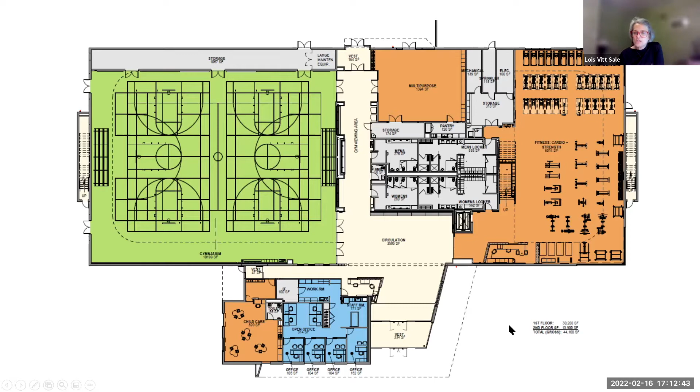It is part of a larger park complex with a 9-hole golf course, a skate park, and soccer fields. This was their first large-scale rec center in the suite of their buildings. It has an upper story with an 8-laps-per-mile running track, a few good-size fitness studios, and an exercise mezzanine accessed through the fitness area below.

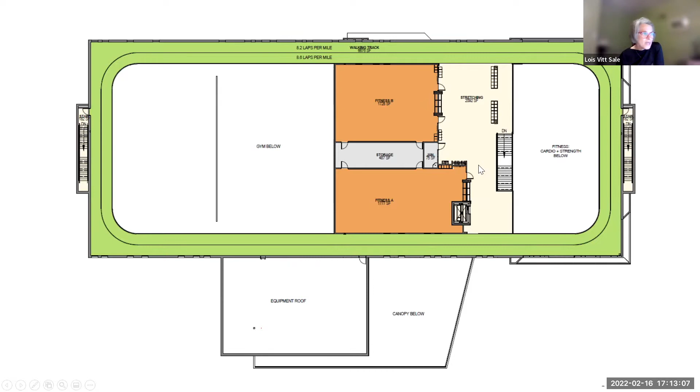So that is the extent of the elements in the building. Now I'm going to show you a bunch of pictures.

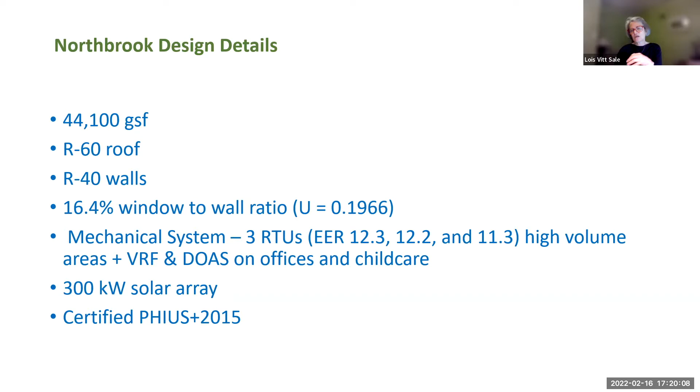In terms of the mechanical systems, we had 3 rooftop units—you can see on the screen their efficiency ratings. And in the low spaces, we had VRF and a dedicated outside air system everywhere for the VRF unit, a small DOAS system. In this building, we had much fewer VRF than in the first one. It's interesting because the RTUs are providing the major percentage of conditioning in the building, since they're serving a high volume space and a much larger percentage of the square footage.

We also ran a model, and we only did 4 inches of under-slab insulation, 4 feet under the slab, so it was an R20 perimeter insulation that ran 4 feet inside. I know passive house recommends under-slab insulation on the whole thing—that may work for smaller square footage, but it certainly kills the budget if you put it under the whole footprint of the building.

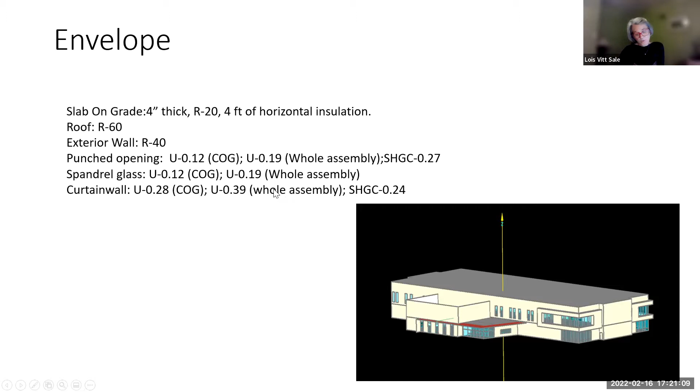So we ran a model, because we had to pass the WUFI model, and we made that work. You can see the U-values of the glazing and spandrel glass. What was really in our favor wasn't so much the glass characteristics as the fact that we had so few glass classes.

I asked our energy modeler, John D. Chen, to give me a discussion slide on the mechanical system. Originally, in both PARC and this one, we found there was a big difference between the way mechanical equipment manufacturers set their equipment up and the way we depend on them to run. Normally in a lot of rooftop units, they're mostly gas. So there's this question of combustion on site and whether it should be all electric or still have gas. I'll show you a snapshot of how much gas is being used now, but we've designed these systems so the gas heat doesn't come on until the building gets to 0 degrees or below.

So they're running all electric until really those extreme temperatures, and of course we're in Chicago, so that happens—but we find that works a lot better when we have the gas set up that way. We had a lot of trouble on the PARC building getting the gas to come on at the right time. Part of the bugaboo has been that in these large gymnasiums, you need to maintain a certain amount of humidity so you can maintain your gym floors—when they dry out, the floors buckle, so you really have to maintain that humidity percentage.

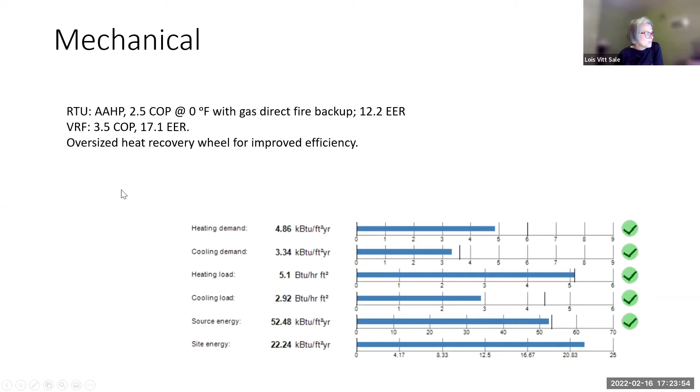So you can see from this chart that we were able to meet the WUFI guidelines. Obviously we also had to have heat recovery. We had a few issues with heat recovery across our zones because we have VRF in one area and large volume RTUs in another, but we were able to figure out how to reap the air off the system for heat recovery.

Here's an aerial of the building, and yes, there's lots of PVs. This array is almost 100 kW larger than the array at our first facility, because we learned we had to have wider margins than all of the models showed us we would need. So we have a 300, almost 313 kilowatt array overhead. The panels are 375 watts apiece, and there are 833 of them.

They were installed at a 10 degree tilt facing south. Our annual predicted production off that array is 368 megawatt hours. At PARC, which is 7,000 square feet less, we were meant to harvest 281 megawatt hours off of that one—just to give you a size difference from one project to the next.

We use the WUFI model for compliance with passive house requirements for certification, and to prove that we could actually get certified. We also simultaneously used IES to run our baseline models because we needed to make sure we'd know how to size the array overhead and predict energy use.

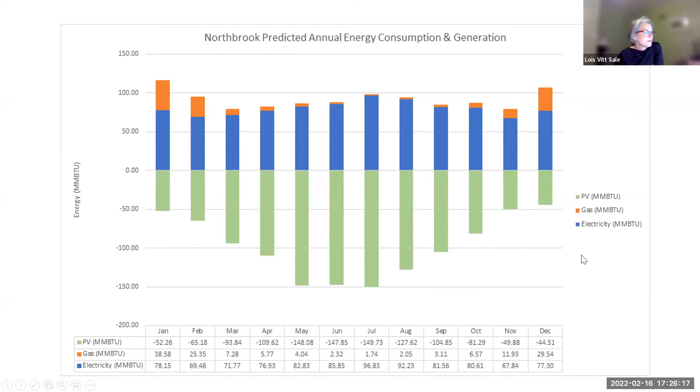This project was awarded a grant of $1.78 million from the Illinois Clean Energy Community Foundation. For those of you here in Illinois, if you're a nonprofit or a 501c3, we are hugely the beneficiaries of a grant program that I don't think any other state can boast of—though you have to be a not-for-profit or public sector project. We've actually been successful in getting 3 grants from the foundation, this being the 3rd.

The first grant was originally $1 million. While we were in the middle of applying, I went on the foundation's website one day and saw the grant was now $2 million. I called up the administrator and asked, 'Gabriella, is the grant $2 million?' They had doubled the size of the grant because there weren't enough projects signing up.

Now they've changed the rules a bit, so you can get 80% of your costs in the form of a grant. The grant will cover not only the cost of the PVs, but also premium investments in the underlying building.

For instance, a building with a precast panel of this size wouldn't necessarily be 12 inches thick. The lower panels are 10 inches, the higher panels are 12 inches, simply because of the cantilever and the size of the wall panel.

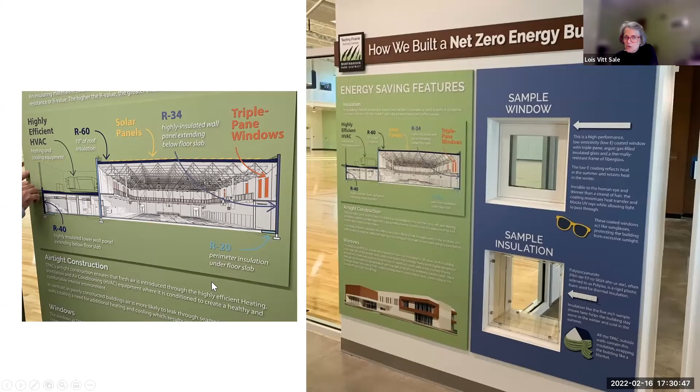In the first project, we basically had our energy modeler learn how to download and interpret the actual energy results that were happening.

As an architect, my experience has been that in every other project, we take the project through occupancy, wave goodbye to the new occupants, and come back every once in a while to ask how it's going. But other than that, we step away. In a net zero energy building, we're there for the duration, because we care that it actually goes from an emerging net zero building to a verified net zero energy building.

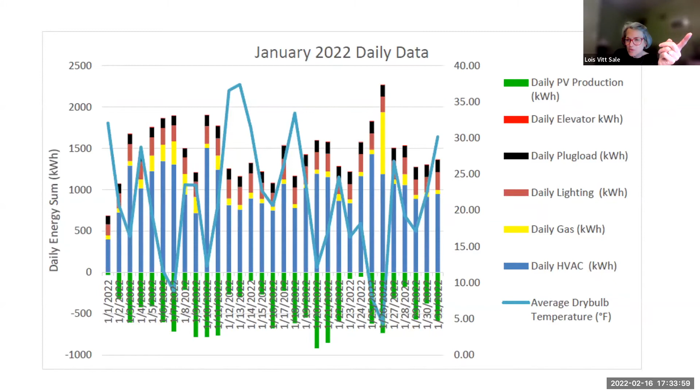The building is meant to produce more energy than it uses every month from March through October. It consumes more energy than it produces in November, December, January, and February. Actually, I was on the phone with our guy from Aero Building yesterday, and he said that the person who watches the facility called him this week and said that for the first time, in February, they crossed the line where in a day the building generated more power than it used. So everybody gets kind of excited about this stuff.

This is to date the 11 months since we've been tracking. We have a total net usage, which means we're in the plus column of almost 20,400 kilowatts positive — in other words, we've generated that much more than we've used. In February, we predicted a net consumption, meaning we're about 400 kilowatts to the negative.

But last month, we actually had 140% PVs generated as compared to predicted. I understand from Aero that the building owners actually sent a crew up and dusted off the PVs a few times, and that has really had a positive impact on energy, because everybody wants the building to be net zero. We have monthly calls, and they've really looked at the metabolism of the building and how to dial it back. But I can tell you, there's been no sacrifices made for comfort.

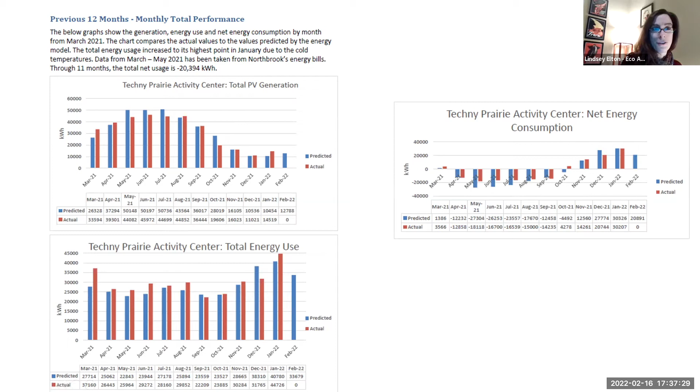Lois, thank you so much. It's exciting to hear this perspective from you, being that we were on the verifier side. We were dealing mostly with the Phius details, but it's really cool to hear some of this qualitative and more design related information that we weren't a part of.

So Curtis, you had a lot of questions, being that you're from Northbrook. So maybe I'll give it to you. Okay, and you can ask away.

This is so exciting to see. I love it, and I recognize the area where this building resides, and it's beautiful. So I'm curious, of all the sustainability standards for this type of building, how did Passive House get chosen? And what was the reasoning for PHIUS Source Zero being chosen over some of the other sustainability standards? Even though I love Passive House, just curious. And how did it come about that this was a PHIUS Source Zero?

Well, as I said earlier, we did another rec center that was Passive House. When we were looking at a Source Zero building, we have a net zero energy building that's verified and certified through ILFI's net zero certification. Those buildings are required to be all electric. I looked at Passive House side by side with net zero certification. In that case, ILFI was requesting that we increase energy efficiency in the building by about 50% over code. That was their goal line. Unlike Passive House, which says you can use this much energy for heating and this much for cooling.